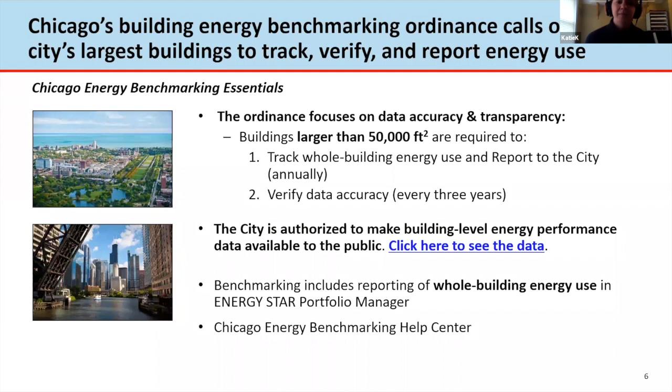The city is authorized to make that building level energy performance available to the public through the city's data portal, which is linked on this slide. The benchmarking ordinance uses Energy Star Portfolio Manager, a free tool to track energy efficiency every year. There's also a Chicago Energy Benchmarking Help Center run by a partner of the city, Elevate Energy, to support any questions that come up during the year in the energy tracking.

As I mentioned, the requirements for compliance include whole building energy use, including electric and gas and any other energy types used for the building. It's based on the previous calendar year's data, just like Retrofit Chicago. So for 2020, buildings will be reporting on 2019 energy data from January through December 31st.

That data must be professionally verified by engineers, licensed architects, and there's a list of about 7 credentials you can have to be that data professional. Also, on the letter you receive from the city, either by email or in the mail, it'll let you know if this is the year you need to have that professional verification.

Every year, that data needs to be submitted to the city through Energy Star Portfolio Manager by June 1st, including June 1st of 2020. That date has not changed this year, as far as I'm aware. And again, it's based on last year's data, so everyone should have had access to that at this point.

Just some impact and opportunity of the benchmarking ordinance. All of the buildings reporting total about 3,000 buildings annually. There's an estimated $21 million in savings per year for energy reductions, just from tracking and being more aware of energy use in the buildings that are reporting.

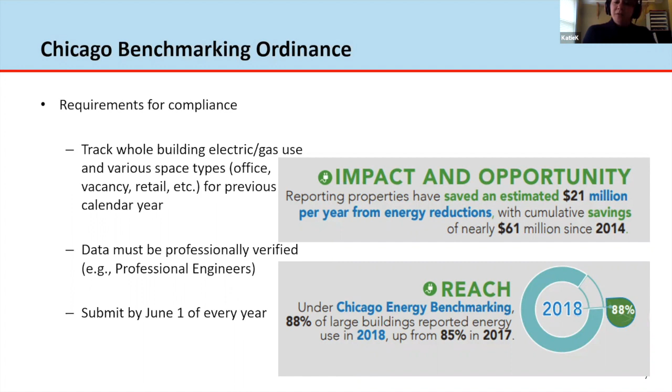Also, Chicago has one of the largest reporting rates of any city with a benchmarking ordinance, with about 88% of large buildings reporting in the past couple of years, which has gone up every year. It's been a really great success watching this ordinance help buildings out and look at their energy use in a holistic way, and we're excited to see where that leads us.

The new energy rating system is a piece of the ordinance that's been added in the past couple of years, with some deadlines coming up right now. The next part of the ordinance, passed at the end of 2017, requires properties larger than 50,000 square feet to also post an energy transparency certificate in their lobby in an unobstructed view.

Really, what this policy is looking to do is not require buildings to do any energy efficiency work, similar to the benchmarking ordinance, but allow tenants, owners, and property managers a better understanding of where they fit in their energy performance. Not everyone is familiar with Energy Star scores, so this rating system helps make it a little easier to understand how buildings are performing in the city overall.

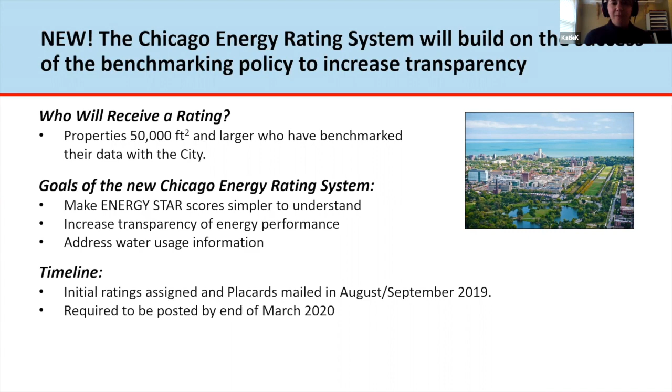The new rating system also addresses water usage. Placards were mailed last fall, and they're required to be posted by the end of March 2020. So you should start seeing those placards up in buildings once we're able to go back into buildings.

The rating system is again based on Energy Star scores. So if you have an Energy Star score of 81 to 100, you get all 4 stars. You can also get half stars, all the way down to 0 stars, which means you did not submit benchmarking information for that year.

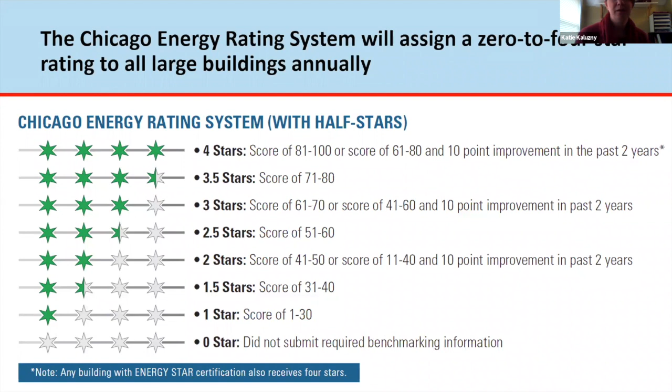Again, this rating system does not require buildings to make improvements. Neither does the energy or benchmarking ordinance, but it is requiring transparency. The ordinance does authorize the city to share water data, and it has new exemptions if the building was recently sold, a temporary exemption, and if there's any rare technical issues, you can contact the City of Chicago Benchmarking Help Center to talk about your energy rating.

The first ratings were assigned in the summer, and people have started posting those ratings. You can see this is the rating placard posted at the Costco on Ashland. I'm not sure where it's posted, but someone submitted that picture, so it's the first one I've seen in the wild.

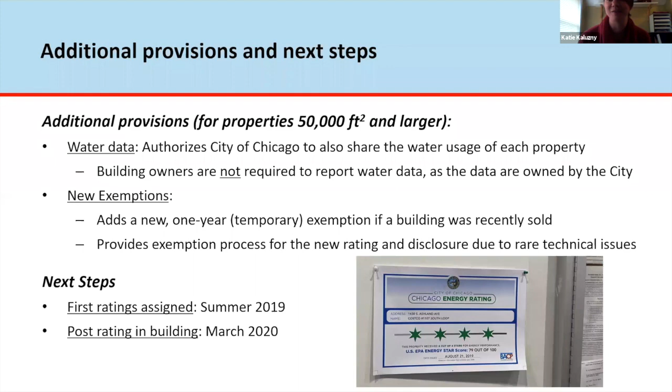So what's next for Retrofit Chicago and the Chicago Energy Policy? The Retrofit Chicago 2020 goals are to increase the number of buildings in the program by 25 more. We have 100 buildings in the program right now, and we're doing outreach and working with partners to get another 25 buildings into the Retrofit Chicago program in 2020.

And to crack that average of 20% across all of the member properties in the program. As I mentioned, we're at about 15% right now, but as more and more buildings are reaching that 20% or even more—a couple are at 35%—we're hoping to really crack that average of 20%.

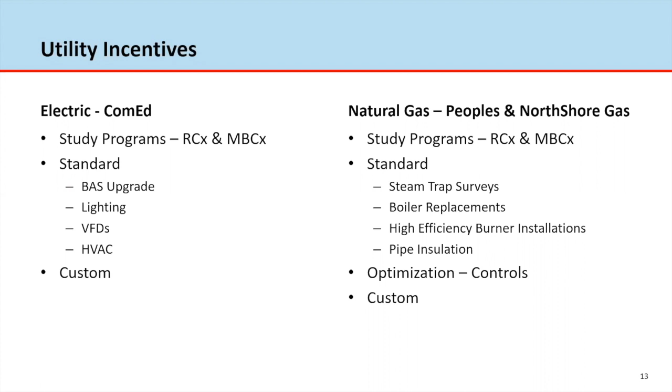So from ComEd's side, I wanted to highlight just a couple of things that may be either updated for you and may not have seen yet, or others that are perhaps lesser utilized. You can see here, it's no wonder that by upgrading your lighting, you can see a vast difference. But ComEd is looking to distribute over $1 million a day in incentive funds, so certainly they're not shy with the value of that program on a year-to-year basis, and they're contracted through the foreseeable future.

Accessing those funds as a commercial building or multifamily high-rise, it's certainly to your benefit to access these funds and find contractors, vendors, and trade allies who can help. Whether it's a ComEd or People's Gas incentive, it's important that your contractor of choice is on the Illinois Commerce Commission energy installer list, a simple application that vets their activity within the Better Business Bureau and good standing as a business in Illinois. Once that's completed and applied for annually, your preferred vendor, whether an electrician or mechanical contractor, is eligible to provide these installations and assist you with getting the incentives.

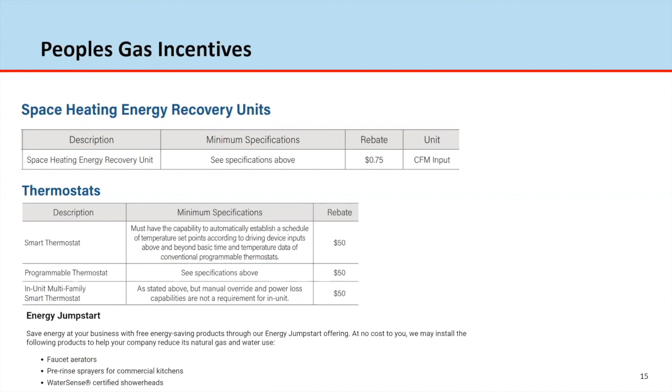Going back to free home energy assessments and bringing this to your new workplace, both ComEd and People's Gas offer free home assessments. Whether you live in a single family home, condo, townhouse, or apartment building, you can work with ComEd and People's Gas to get one. They have staff who come through with equipment, and they'll take a small survey before arriving for your scheduled visit. With your permission, they're authorized to install LEDs, programmable thermostats, WaterSense shower heads, and other products that benefit your home energy use.

So everyone most likely has some sort of blinds or window coverings that they can use when it's really warm or really cold outside. These can be used to keep out heat in the summertime and keep in heat in the wintertime. Making sure you're aware of the impact blinds can have, whether at home or office, can help with your energy use and thermal comfort within the space.

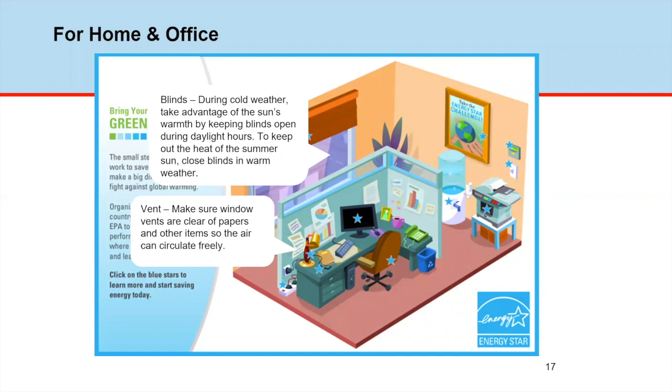Now, if you're at home, make sure that some of the vents around aren't covered by beanbag chairs or kids' toys and other things, so that you're getting the full benefit of your home furnace and air conditioning system, and it's not hampered by anything that could get in its way.

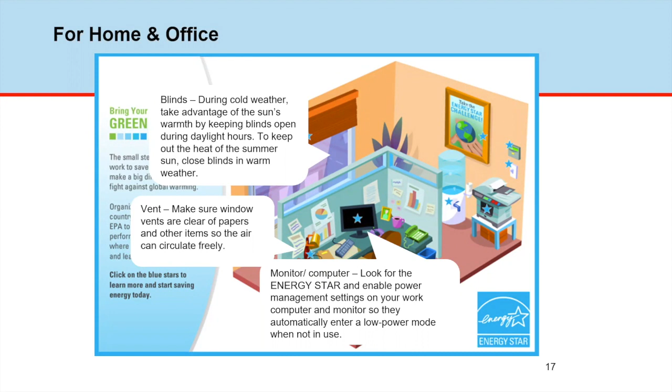There are some power management opportunities to help with your energy use, especially if you're working from a large space that perhaps has a call center or a large volume of staff. And of course, programmable thermostats are a great way of managing your temperatures and energy use at home.

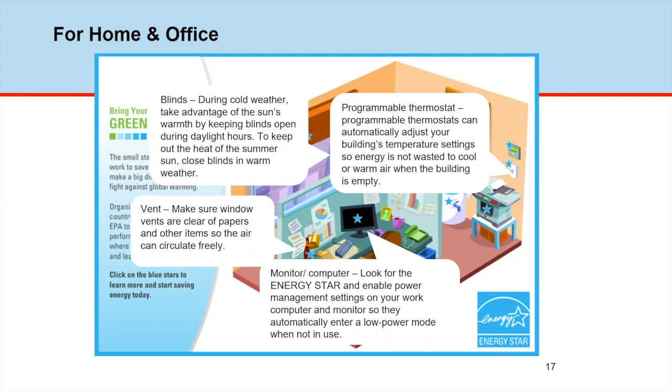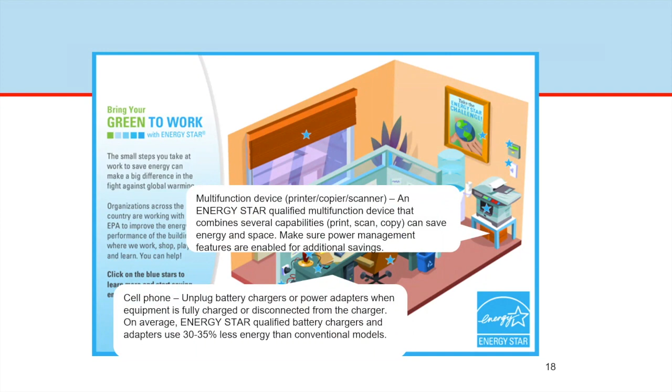Another tip: once your cell phone or other devices are fully charged, keep those unplugged when you can. Only keep them charged when needed. There are a lot of Energy Star products out there you can take advantage of, whether home office tools, office tools, or home appliances.

And then this one I like a lot, the challenge poster. Inciting a challenge within your home or workspace is a great way to encourage people to look for these types of opportunities. The Energy Star EPA website has free brochures, posters, and handouts you can deliver to your tenants to encourage these activities.

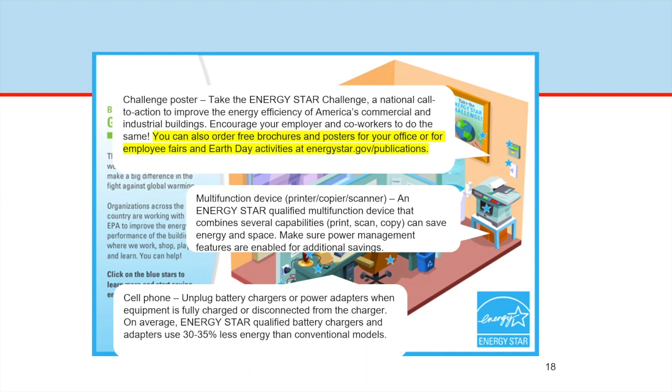Just a few more items that have Energy Star ratings available in case you didn't know: water coolers, desk lamps, switching to LEDs from CFLs or even incandescents if those are still around, and power strips, some of which have smart technology. Utilities, both electric and gas, offer these as part of their home energy audits, so you can get them at a discount delivered for immediate use.

And then, as simple as turning the light switch off when you're outside of a room can pay dividends, especially if you're back and forth between different spaces.

And then, of course, someone has to lead this charge, whether at home or the office. Setting someone up to be the champion ensures there's someone setting goals and keeping people accountable for how they operate in the space. This might be a great way to keep children or teenagers occupied—set these targets and put one of them in charge of keeping the home energy efficient.

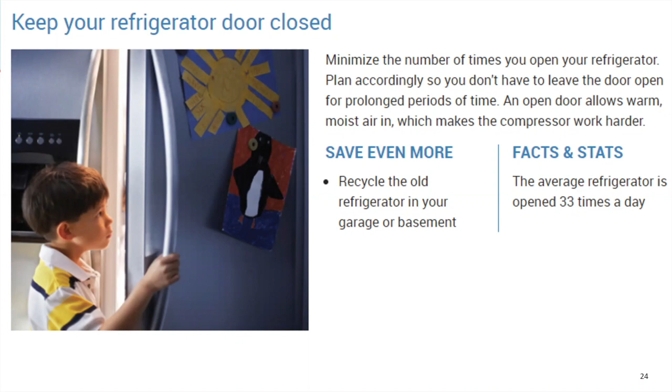Kind of like how they say you touch your face 1,000 times a day or whatever it is - this was a number that was startling to me. So keeping track of snack time and keeping that door closed whenever possible is certainly to your benefit, and keeps your goods nice and fresh.

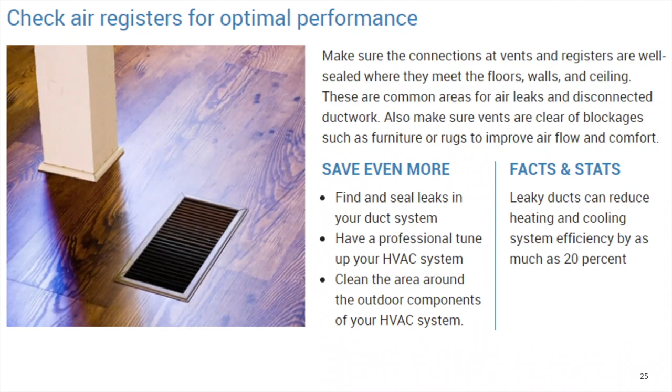And then another one we talked about for the home office or office side of things: some buildings have underfloor heating and cooling ventilation units. At home you likely have these sorts of registers, so make sure they're free of any obstructions, find ways to seal leaks, and have a professional evaluate your HVAC system regularly - seasonal from summer and winter, or at least once a year - to find any potential recommendations to improve and keep your home nice and conditioned.

So make sure your HVAC equipment is being regularly serviced if it's not getting fresh air from outdoors - which I learned many homes, condos, and apartments don't necessarily have, since your air intake might be coming from the room or from that HVAC closet instead of an outside space. Make sure you're regularly opening windows to get fresh air into your space - it'll keep people happy, freshen up the space, and drop that ppm below 1,000, which is considered the safety standard in the city of Chicago at the very least. It'll keep people comfortable, focused, and happy.

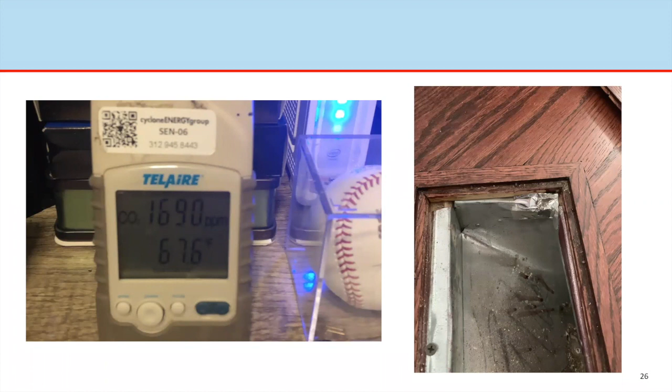The other one here is my floor register. As you can see, I inserted - I probably should have circled it - some duct tape, actual heat thermal duct tape, on my register on the floor because there was a massive gap in this unit. So to help prevent any leakages or inefficiencies in our system, I decided to seal that up. The Energy Star website says that doing simple things like this, or having a professional run through the entire duct system, can save up to 20% on your home energy use. So some food for thought.

And then of course, some more stuff to keep kids occupied - Energy Star has a segment for children. It looks like it's also partnered with Dr. Seuss, so that's very exciting. It has a lot of little games and things kids can work on to keep occupied and understand a little bit more about energy use and helping the family make these opportunities happen. And that's all I have.

Katie, I believe you have a couple slides here that you'd like to share with everyone.

Yeah, just adding on to what you were talking about, Dave, with what you can do at home and in your community. There's a great website called earthdayecochallenge.org.

It's a challenge that runs from April 1st to the 30th, but you can join anytime. It's great to check out individual actions you can take at home. It gives different resources and links to learn more, things you can check off that maybe you already do. Some challenges are daily and some are one-time, but it's a really cool website. And if you wanted to start a team, even between now and April 30th, you can compete against other people in the challenge as well. So check that out if you have some time.

Again, great opportunities to think about things you already do, but also some small ideas you might be able to implement while you're home.